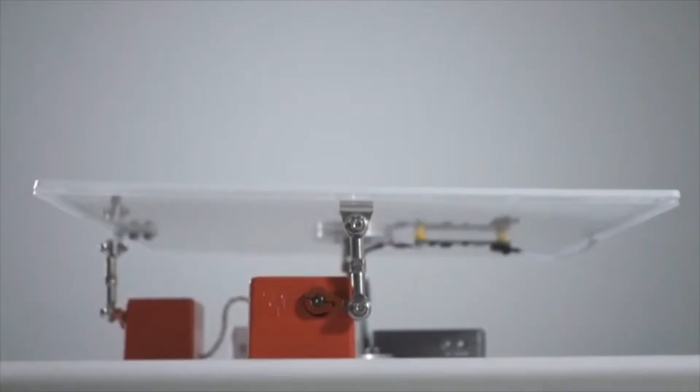Welcome to our webinar about classical and advanced control algorithms in different systems. Today, myself, Candan, and Parsa will be presenting you our webinar.

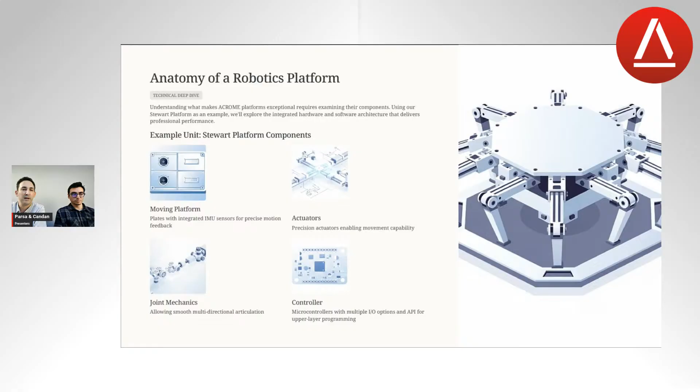And finally, there is the electronics part, where the algorithm is running, all the electrical motors are fed with power signals, and feedback signals are taken back. So this is, in general, briefly what makes a robotics platform.

Now, the heart of the robotics platform is the software, because to achieve the final goal, to move an object from point A to point B, software should run, and this software, in the domain of robotics, is called the control software, or control algorithms in other words. And there are very different options for the control algorithms. For this part, I will ask Parsa to go through these two different types and what they mean.

Sure. So in this video, we are going to talk about mainly two types of controllers, classic controllers and advanced controllers, and the types that we use mostly in our devices. Under classical controllers, we have on-off control, P, PI, PD, and PID controllers, which are mostly used in the industry. And then we have fuzzy logic control. Under the advanced controllers, we will talk about the linear quadratic regulator, or LQR control, reinforcement learning, or RL, and ML-based control.

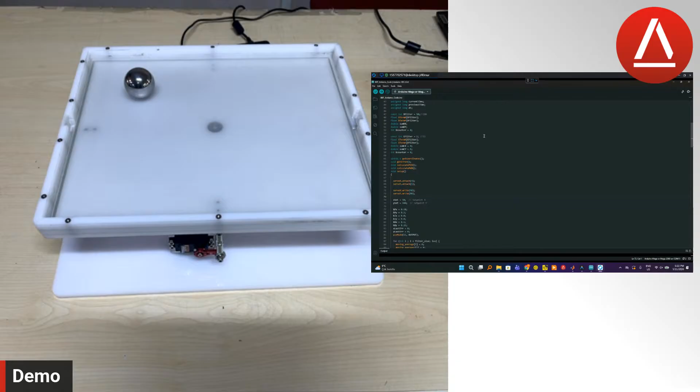Code. This one is a little bit dense content, but let me try to explain the concept first, and then Parsa will be showing us the code behind. So we will be showing you LQR plus I, which becomes LQI control. This is an optimal state feedback controller. So that is the I extension to the LQR. So optimization is taking care of it.

And maybe the question: why LQI? So on the right hand side, the main reason is to eliminate the steady state error. With PID based applications, there is always a steady state error. It can be minimized, but it varies a lot with changing conditions. If the ball's location changes, then the integral gain needs to be changed. If the mass of the ball changes for some reason, then again, every PID coefficient needs to be recalculated, retuned. There are adaptive PID applications as well, but the best thing in such applications, more optimal control kind of applications, is supposed to be LQI or LQR based control.

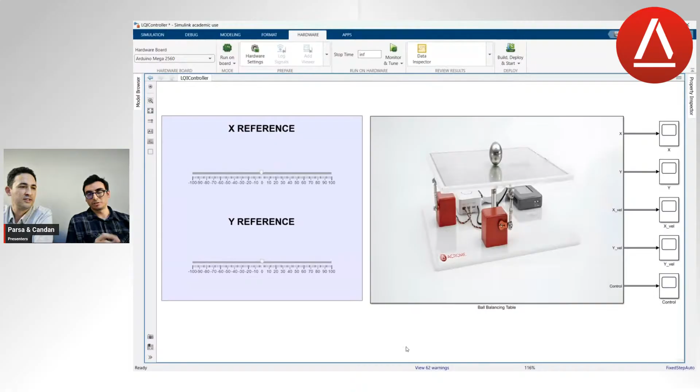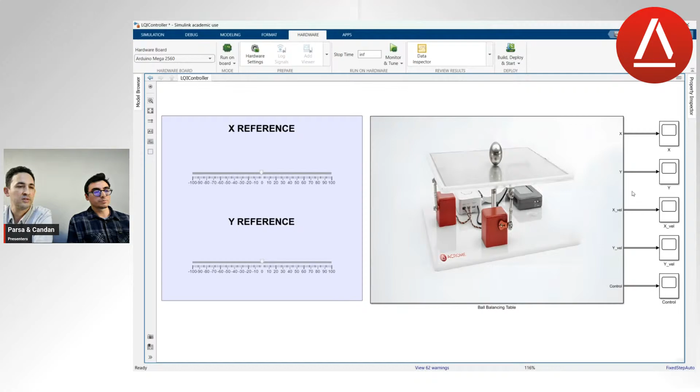Okay, so let's display Simulink. Here is the main basic Simulink user interface. You can give the X and Y reference points, and on the right-hand side, you can see all the X, Y velocity and their values inside some displays, as well as the control signal.

If we come to the background where the Simulink code is running, we can see three main parts: the LQI controller, the system, and the Kalman filter observer.

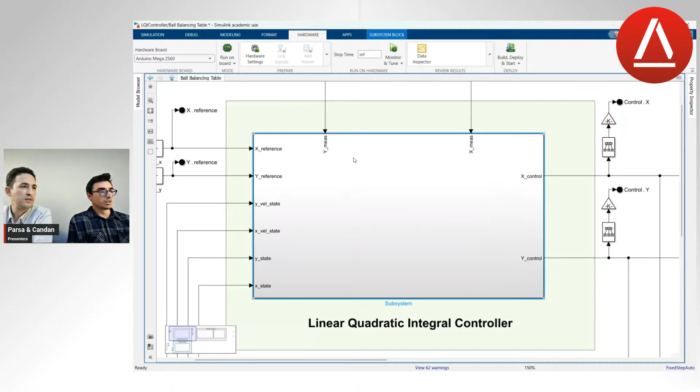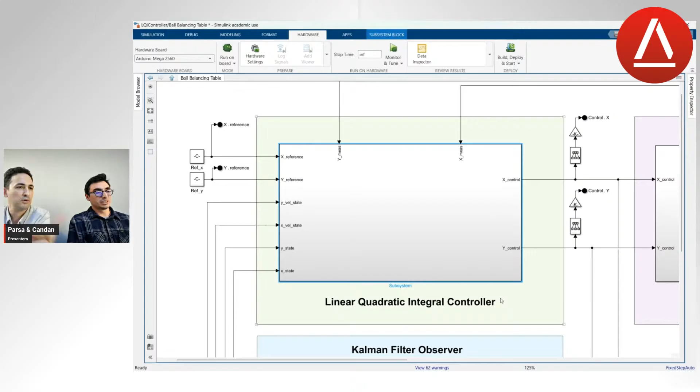Starting from here, we feed the loop our reference points, or set points in other words. Then we have the feedbacks, and inside the LQI controller it gets the references and the measurements, and as output it gives the X control and Y control. On the left-hand side is the state space representation of the states.

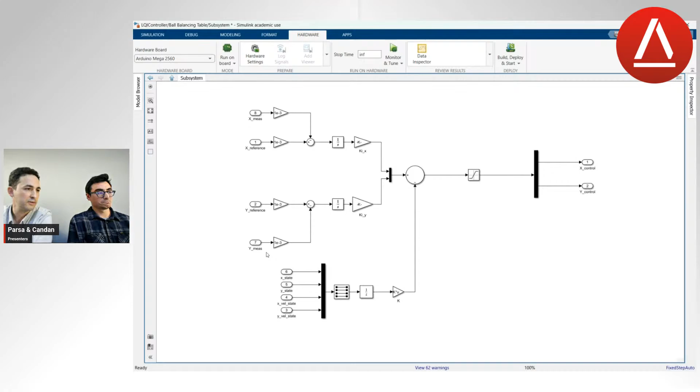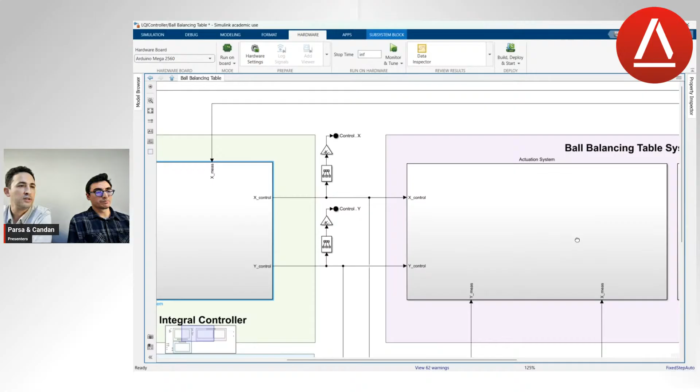Next we have the X control and Y control coming to the actuation system, which is fed into these gains, and then summed by the calibration values. We feed them to the servos through this S function.

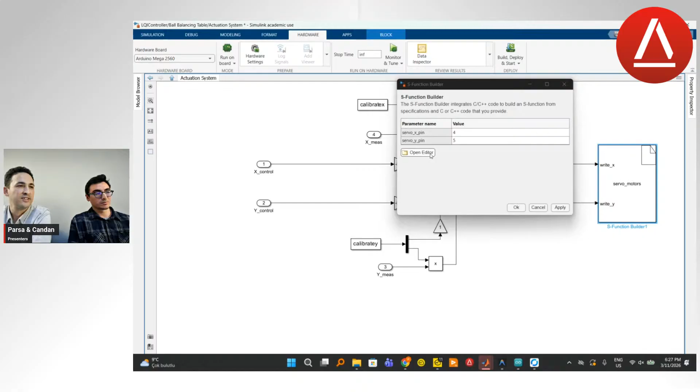Can you explain what this S function builder is and where it's running? Let me just open it. This S function is actually written in C++, and this is just to drive the servo motors.

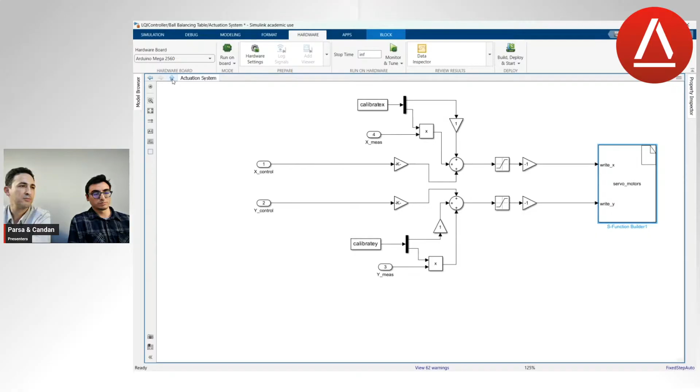The algorithm is running and being compiled to the Arduino. Of course, we have this measurement part, which is separated from the actuation system.

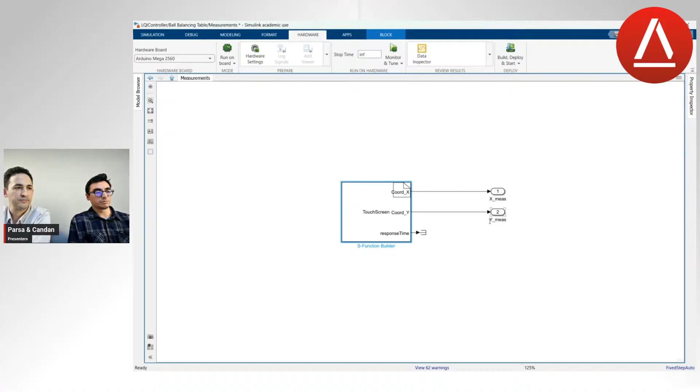So we get the touchscreen coordinates, or the coordinates of the ball, which go to the X measurement and Y measurement. Again it is an S function that is read from the Arduino.

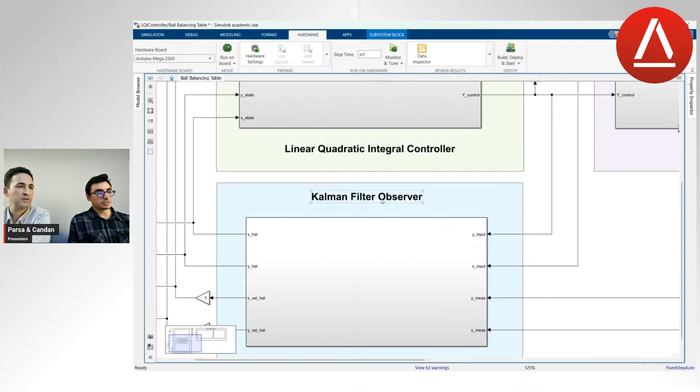And then here in a loop, we have this Kalman filter observer for better resolution, for the optimal control.

Can you open also the observer? Let's show the people what we have. So it's again an IO device builder block which is built with MATLAB Simulink functions directly, and every part can be investigated or changed.

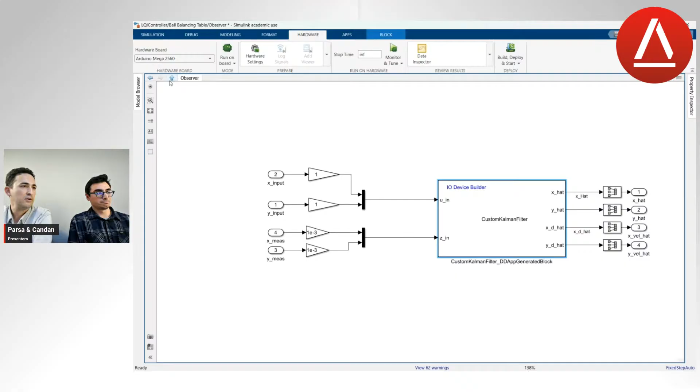I think this concludes this part. So let's go to the third demo or third topic in our presentation, which will have some demo session as well, the RL based, or kind of another advanced control method.

This one is actually a combination of a classical controller, a PID controller, which is still required to fine-tune the position of the ball, but the platform has a goal of moving the ball to solve a problem, and the problem is a maze problem.

We created a maze based on plastic parts, and the aim of the application is to move the ball to solve the maze and go to the exit. That can be done with different methodologies, but reinforcement learning is a very good one to implement, and a ball balancing table is a very good example to implement the reinforcement learning application.

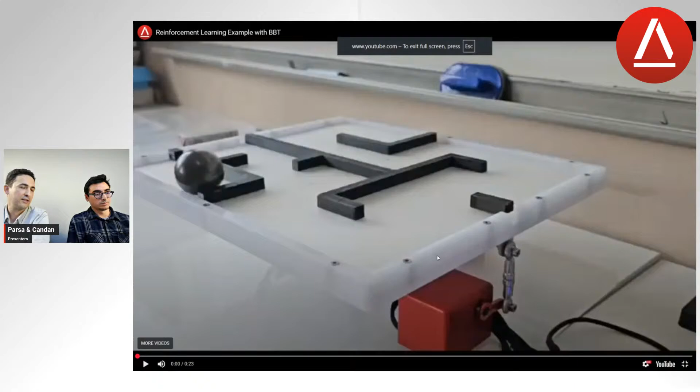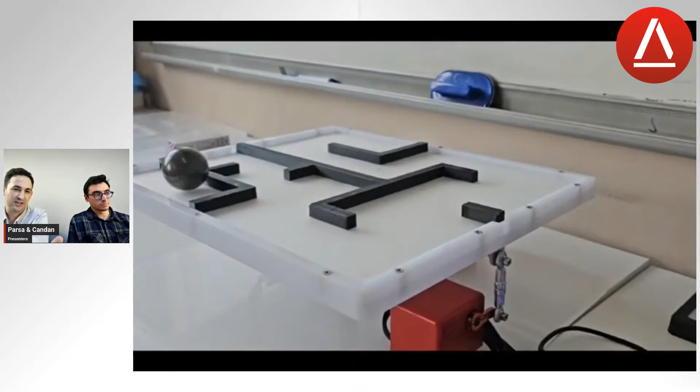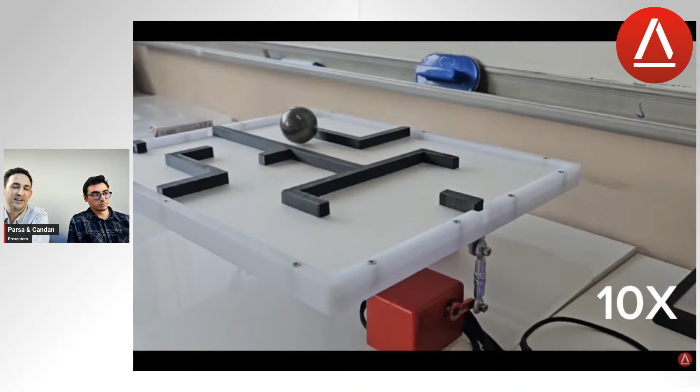The one thing we don't do is a live session, because it takes time for the algorithm to solve. The video is also 10 times faster than usual, but it gives the main idea. I think in this, the starting point is selected on that left corner, and the goal is on the right top hand side. Something like that.

Okay, so let's go back to the presentation part and tell you about the future extension.

So now we are thinking of doing a little AI implementation, maybe with deep reinforcement learning. Currently, it knows the starting and the goal, but in another iteration or implementation, it can do it blindly, and it can understand if it hits the wall, so it's not moving, and it can try to retreat back. So all of these are possible with some future work, future extensions.

Now let's talk briefly about a summary on the differences, advantages, pros and cons of using classical methodologies versus the advanced methodologies. So Parsa, please.

Starting with the PID or classical, we have the design part, which is actually the PID or gain constants, which can be tuned manually or using the Ziegler-Nichols method. As hardware, we can use the STM32, the Arduino, and the Raspberry Pi, as wished by the user. And for the software, you can use Python, Arduino again, or C, C++, as well as MATLAB and Simulink.

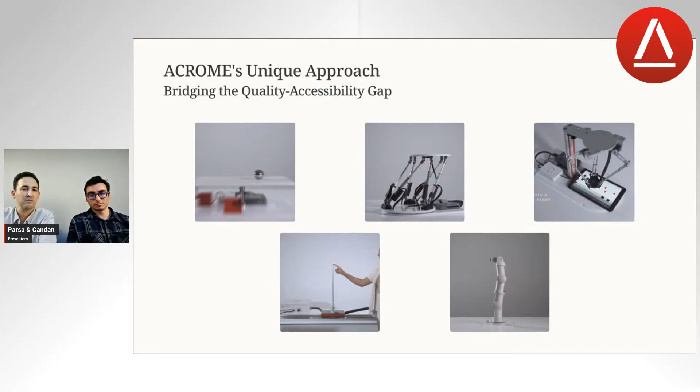Before finishing the presentation part, I would like to discuss a little bit about ACROME's products, and for that let me go quickly to this slide. The ball balancing table is one of the products which today we selected as the demo system. But we have some other hardware in mechatronics and robotics, which are candidates for automatic control, whether simple or complex, or advanced control algorithms as well.

We have upcoming webinars where we will be taking another product, doing some other demonstrations on that product and on different topics as well. So this concludes our presentation part, and now we will be going into the questions and answer session.